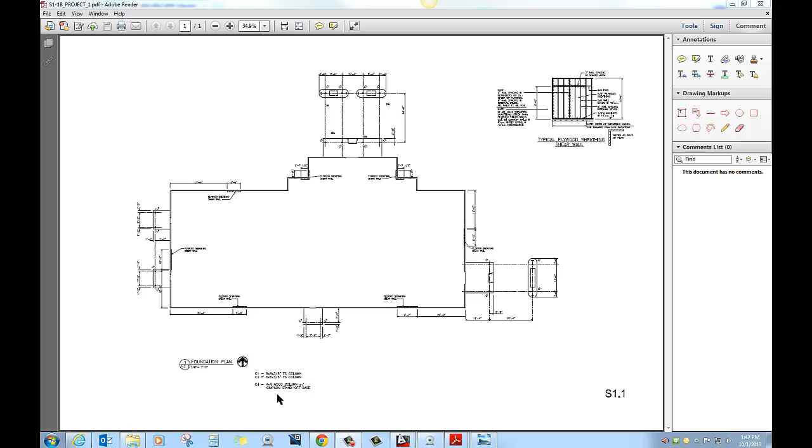What we want to look at now is some specifics about a couple of the notes and just some general structural elements that are going on here and how they work. Again, down here on the C4 column designation, it says that it should be a 4x4 wood column right here with a Simpson standoff base.

What I want to do is kind of look at what they're talking about and just talk a little bit about these different connectors. This is strongtie.com. It's Simpson Strong-Tie's website, and that's kind of the industry standard when it comes to structural ties for wood construction. They do some for other things too, but it's basically just wood is what they're known for. And there's other types, but this is the industry standard that everybody goes by.

It's a good site. They tell you all about their products, what they have. You might want to explore it because there's a lot to it. You can see over here they have load tables and images and all sorts of things you can get from them. But I wanted to kind of focus in on what they're talking about with a standoff. You can see right here we're talking about standoff post bases. There's different types, but this is a basic one.

What it is, it's just this little metal base, and you can't see it real well. We'll see it in a little more detail in just a second. Actually, we'll go ahead and look at this one. There's holes in the bottom of the base for the anchor bolts to go through. And so what happens is you could put anchor bolts in the concrete. They would stick up through these little holes right here, put the nuts on them, anchor it down, and then this plate right here is actually what the post sits on.

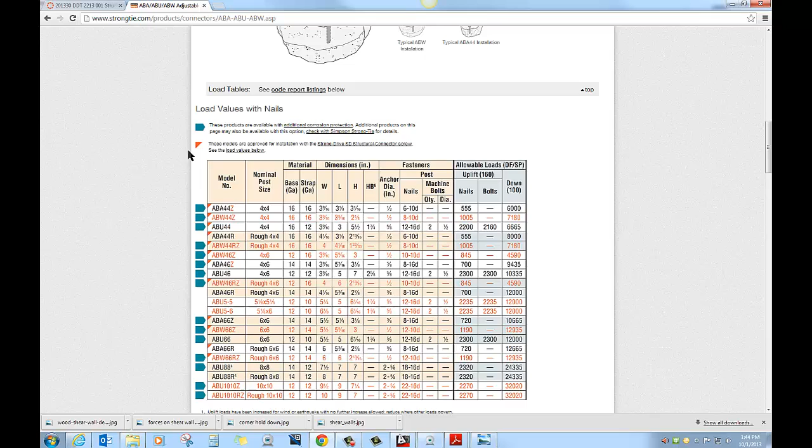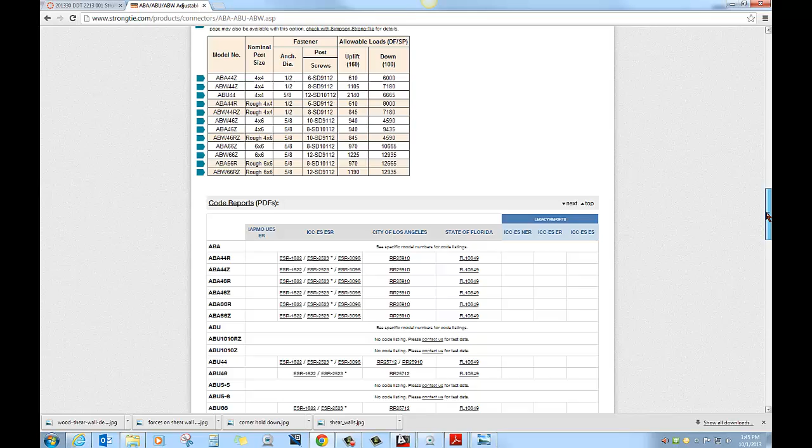But they give you all sorts of tables about how much weight it can hold, what size post you would need to hold certain weights, all sorts of information on this particular website. You get PDF files, and you can see different cities have specifications that are different than other places. And if you wonder why Los Angeles and the state of Florida, well, in Florida, obviously hurricanes are a big problem there during the season, because they're just a big peninsula sticking out there, so they have a little stricter codes. In Los Angeles, we have a lot of seismic earthquake problems, so there's a lot of ties for that as well.

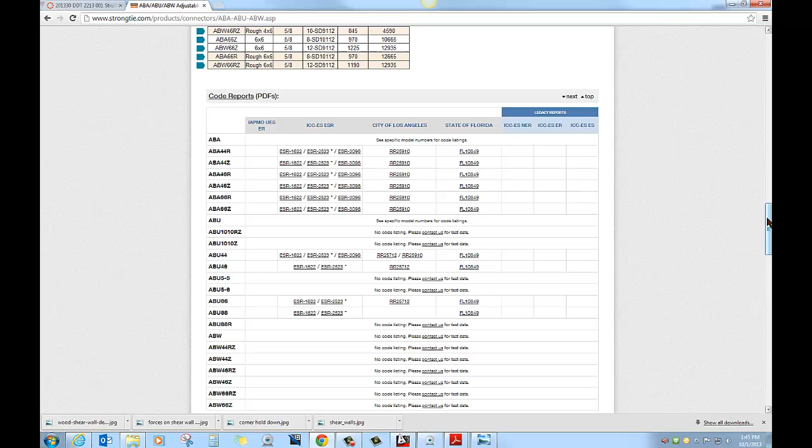CAD drawings, you can download all these different connectors so you can specify them on a plan and actually show them as they should be, and not just make up something. And that's a great thing. And somewhere, I don't remember exactly where, you can actually order a CD that has all their products on it, and it's free. They'll send it to you. But this right here, step-by-step installation instructions about the particular tie or particular base, links to all those things we just looked at, tons and tons of information on here.

But again, you kind of need to at some point get familiar with some of these, and we'll talk about a few of them as we go through. But I just wanted to kind of introduce you to the site, what exactly we were talking about when we said standoff post base, and then show you all the information that you can actually get on this particular site.

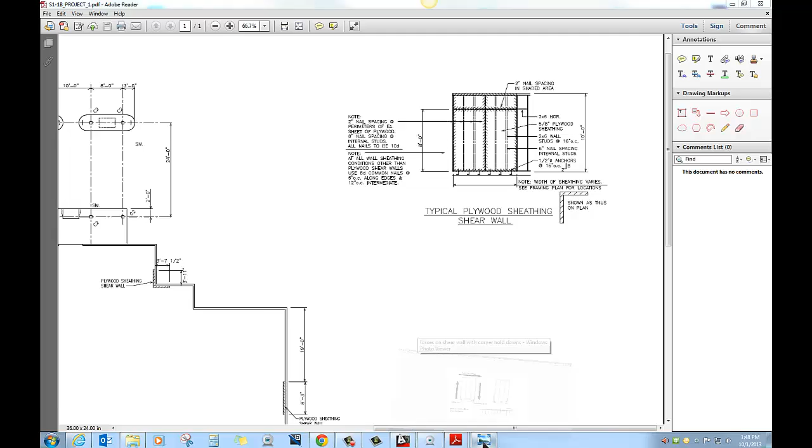Alright, the last thing I wanted to look at in the sense of this foundation plan and these things we've added to it are shear walls. We've seen this is the detail for how we're going to construct the ones on this particular plan. We've seen where they are, what they look like. We just have, of course, dimensions coming off slab edges to place the walls. But what I want to do is look at just a few images that kind of depict why we're doing what we're doing. This is a very basic image of a little shear wall and how it works, the whole point of it.

The point is that we have this wall where you can see there's double studs here, double studs there. It's a little 4-foot section. And they have these special connectors on the corners, and we're going to look at those in just a second. But the whole point is that if this frame is framed like it should be, doubles on the outside, double at the top, these special connectors on the corners, and plywood over it, like we looked at on our detail,

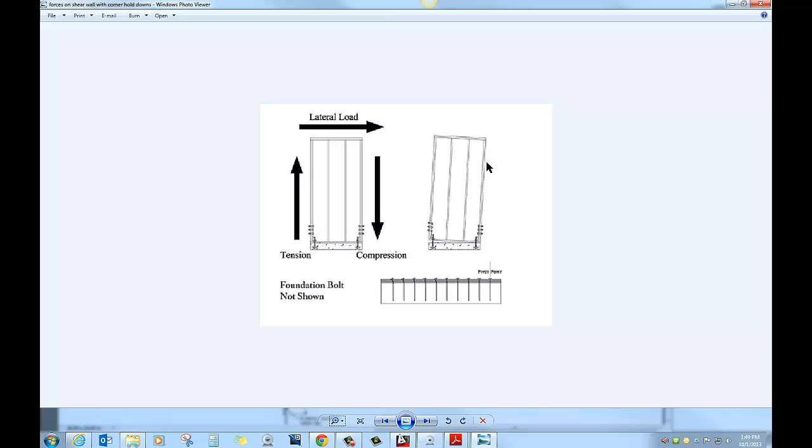then when a lateral load hits it, like a wind force, for us it'd be wind off of a hurricane, say, then it's going to have compression coming down and tension going up. It's trying to pull it up from this direction and press it down in this direction from this lateral wind load. And so what it's going to try to do is rock that wall. Well, the whole point of all these connectors and the plywood is to keep that wall intact so it doesn't just fold over and collapse like a bunch of dominoes. So that's kind of the point of the shear wall and why we're doing it.

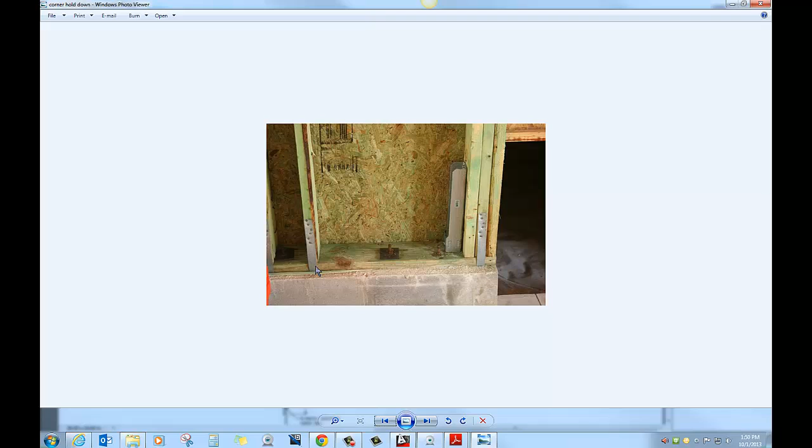What happens is these are actually either embedded into the concrete before it dries or tied down themselves with some sort of metal connector underneath the studs. Most of the time they're just embedded in the concrete, and then after you get the wall in place, anchor bolts in place, put the nut on, put the plate on, anchor the wall down, these are folded up and nailed in to add even more support from uplift from the wind or whatever is trying to pull that wall up. Those are all meant to, again, hold it down, which obviously is where the name came from. It's a hold down for the corner.

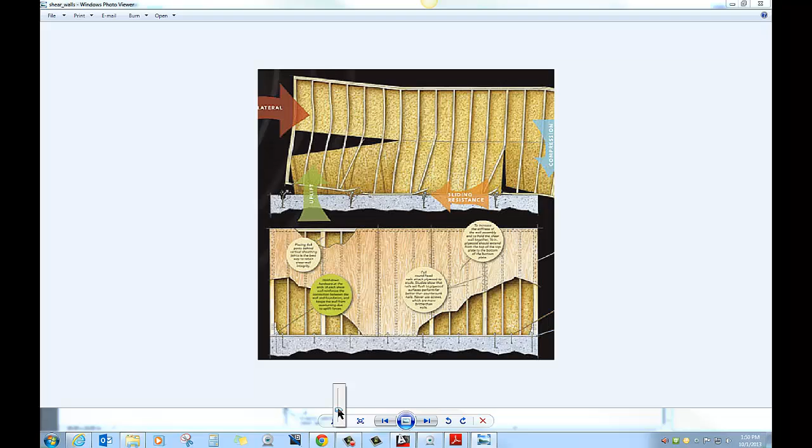This is a pretty good example, and you can't read the notes, but you can see the picture well enough. This is an example of a shear wall as it should be constructed. Again, corner hold downs right here. Every 4 feet, we got double studs. Actually, most times for us, we have triple studs on the actual corners. Double studs about every 4 feet. And then we get to the other corner, another hold down.

And then in between, we have varying sizes of anchor bolts. The spacing and the size of the anchor bolts is going to depend on where you build and what they say the wind loads are for that particular area. But most of the time there's more than what we consider normal. And then, of course, the plywood sheathing, a lot of times it's at the very least 1/2 inch, most of the time 5/8, something like that.

And then on each perimeter of it, like we said on the detail on the plans, usually about every 2 inches you're going to have a nail, and then a minimum every 6 for the interiors. So there's a ton of nails in this thing. So by the time you do both sides of that wall with all those nails, with that thick plywood, plus all the anchor bolts and the hold downs and the double studs and all this, you've got a really strong wall.

And so the point is, again, when that lateral load hits it, you've got so much reinforcement that this wall hopefully will not totally give. It might slide a little bit, it might buckle a little bit, but we want it to stay where it's supposed to be for the most part. And it's wood, yes, but with all of that wood put together like that, it's very, very strong. And so battling all these forces, it does a really, really good job.

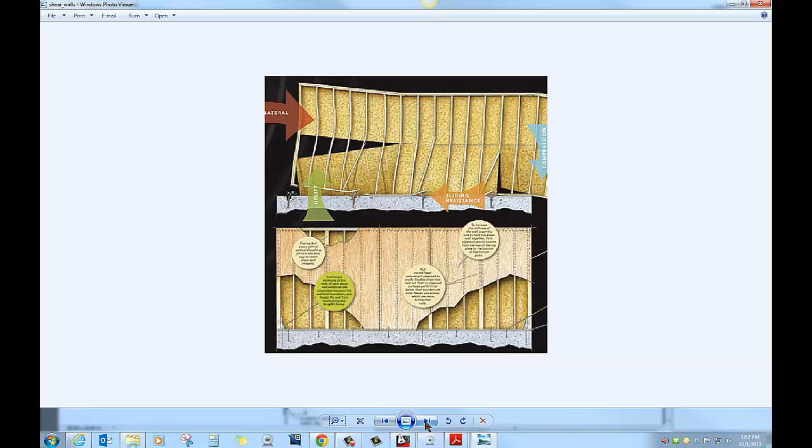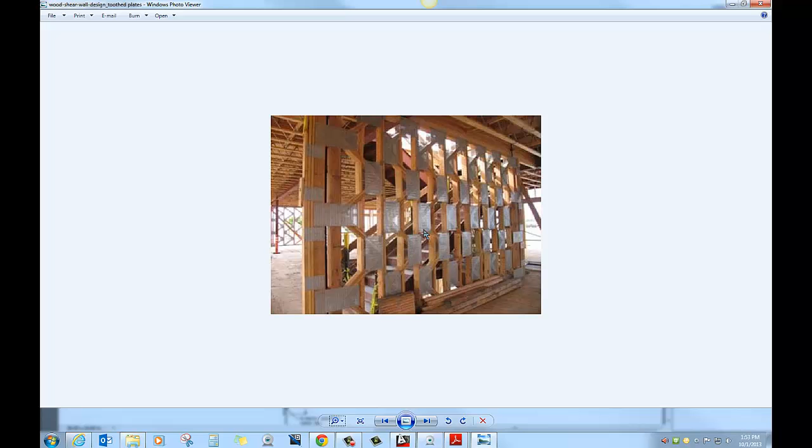And depending on the structure, if it's trying to guard against wind, how it's trying to guard against earthquakes, how large it is, how tall it is, all these different things, how much weight it's holding up, they'll have to be engineered in different ways. But that's a brief overview of shear walls, how they work, how they're built, and what the point is.